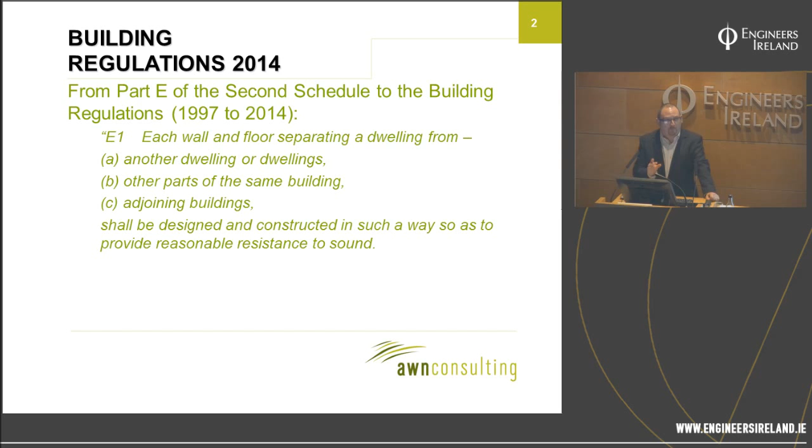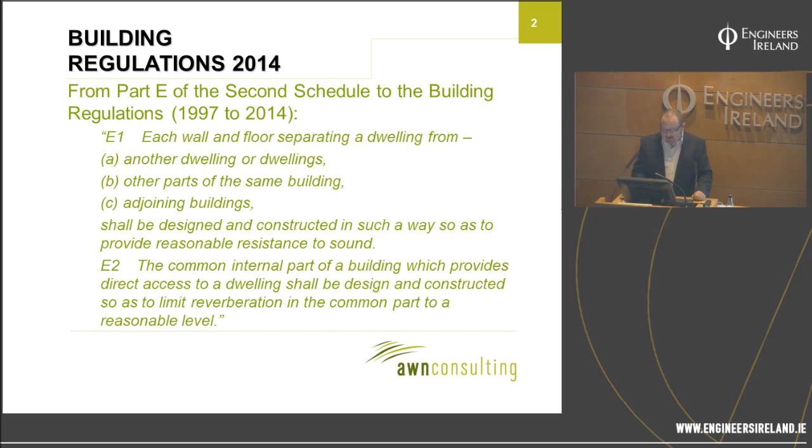We also have a brand new regulation: the common internal part of a building which provides direct access to a dwelling shall be designed and constructed so as to limit reverberation in the common part to a reasonable level. That's really talking about entrance halls, stairways, and corridors giving direct access to multi-occupancy dwellings, so apartments opening off some kind of common circulation area. The idea is to keep reverberant noise build-up down to a reasonable standard to prevent that noise breaking through and transferring into the apartment. That's a brand new regulation, and again there is some concrete guidance as to how it's to be applied.

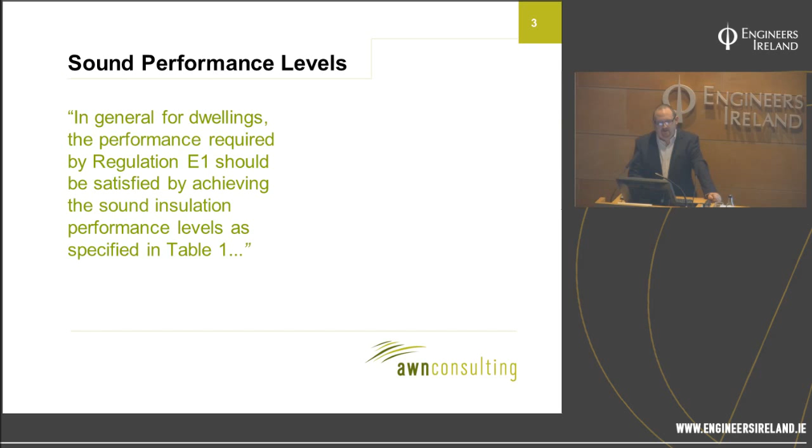So that term 'reasonable resistance' - we now have an absolute performance requirement, and they're set out in Table 1 in the technical guidance document that accompanies the regulations for Part E. I've reproduced Table 1 there.

We're looking at sound insulation in respect of both airborne sound and impact sound. Airborne sound is the sound of a voice, television, anything that travels through the air across the separating construction into the apartment next door, the dwelling next door, or the apartment below. So that's airborne sound. Impact sound is primarily footfall noise. It's only applicable to floors, and it's the noise of people walking around, moving furniture, or dropping things.

Now the way in which these performance standards are set differs - we use two different indicators. For airborne sound we use an indicator DnTw, weighted standardized level difference. That's basically a measure of the degree to which the separating construction reduces the transfer of noise from one side of the partition to the other side. So in terms of airborne sound, the higher the better. The requirement is 53 decibels for both walls and floors.

Impact sound, on the other hand, is measured in a different way. When we measure and assess impact sound, we use a thing called a tapping machine, an instrument that we set down on the floor. It lifts and drops a series of hammers, generating a known level of energy within the floor, and we then measure how much noise is created down below. Obviously the more energy created down below, the louder it is, the worse the floor is performing. So in terms of impact sound, the higher the number, the worse.

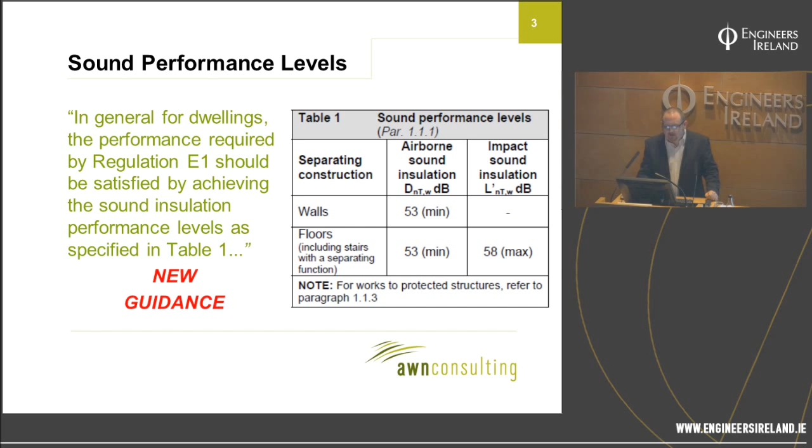So airborne sound, the higher the better. Impact sound, the lower the better, because it means we're generating less noise for any given footfall in the room below. That's all brand new guidance.

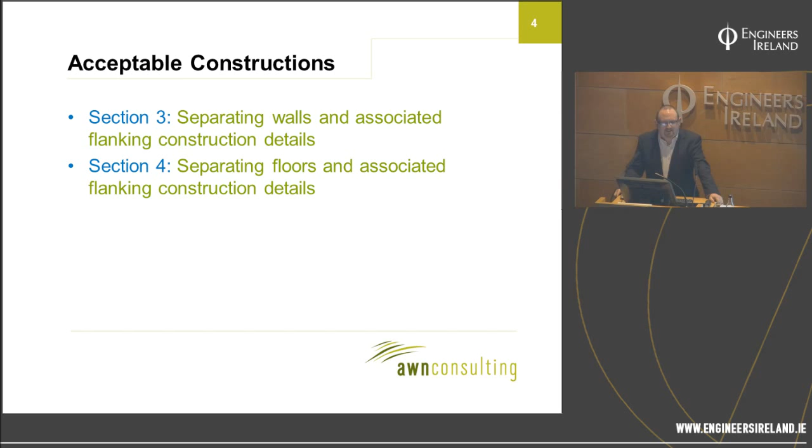Part E, the technical guidance document, contains details of what they term acceptable construction. Section 3 covers separating walls and flanking details. Section 4 talks about separating floors and flanking details. Basically what the regulations are saying is, if you design and construct your separating constructions in accordance with those details, you are in essence in prima facie compliance.

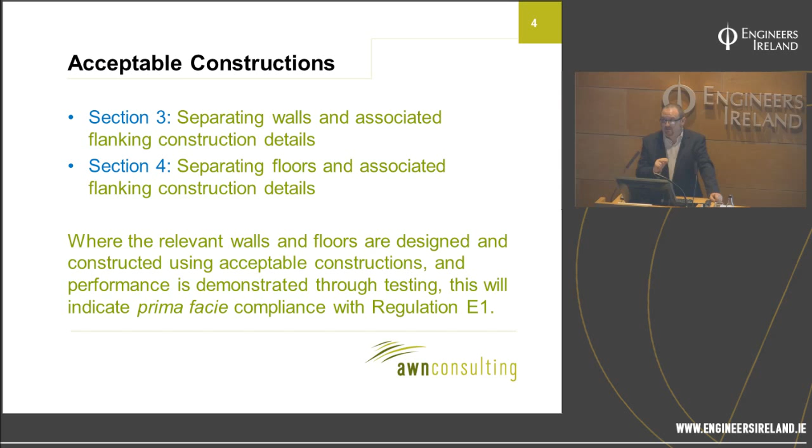But the difference between the current regulations and the old regulations, where that was enough, is that you still have to test the construction. Because what they're saying now is that you're in prima facie compliance in terms of the design, but now you need to go to site and measure the performance in situ prior to completion to make sure that workmanship is of the appropriate standard and that site conditions are fully accounted for. So we can build using these acceptable constructions, but we still have to test them. The advantage being, if we build using these standard constructions, you can conduct fewer tests in order to demonstrate that they're achieving the appropriate level of performance.

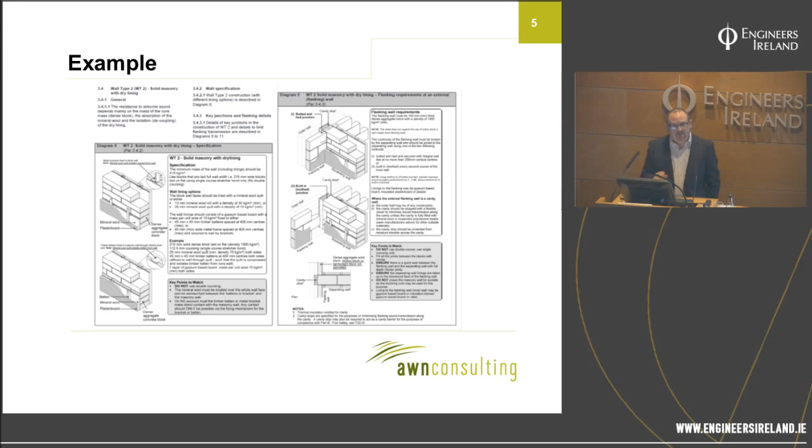Testing is a big part of the new regulations, and it's something we've been lobbying for a long time, because in essence the old regulations relating to sound were pretty toothless. You had no absolute performance requirement that was mandatory. There was no statutory or mandatory requirement for testing. So generally you'd find you were only doing a test where there was a problem, and you were doing it to find out what the problem was and tell them what they had to do to fix it.

But testing is now mandatory. It needs to be conducted prior to completion, and it needs to be undertaken by a competent person. I'll come back to that and dwell on it later, because the regulations are extremely hot on competence, and there are a few reasons for that.

So in essence, you want to undertake tests on a representative sample of your dwellings. You need to look at the different unit types, the different layouts, and in particular the different constructions, and develop a testing program that takes all of those into account, giving you a good cross-section across all the various constructions and unit layouts.

Now, other construction types require more tests. In other words, an 'other construction type' in the context of the regulations is one that isn't set out in Technical Guidance Document E. So if you're using one of those non-standard constructions, you need to do additional testing. However, there is a way of avoiding that, known as the assessed sound detail - I'll talk about that in a minute as well.

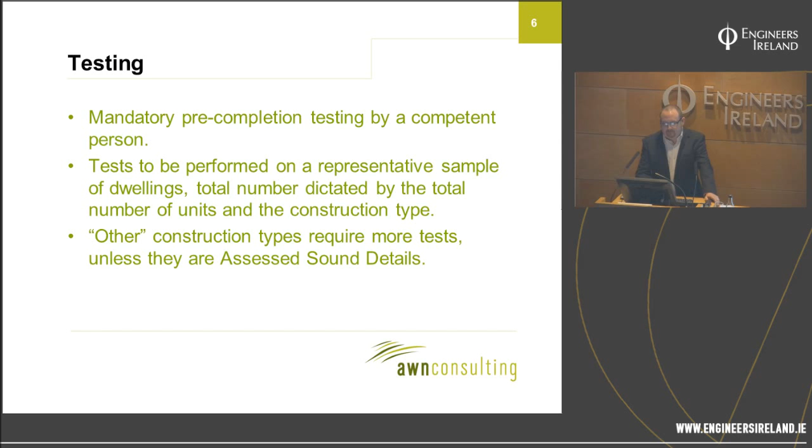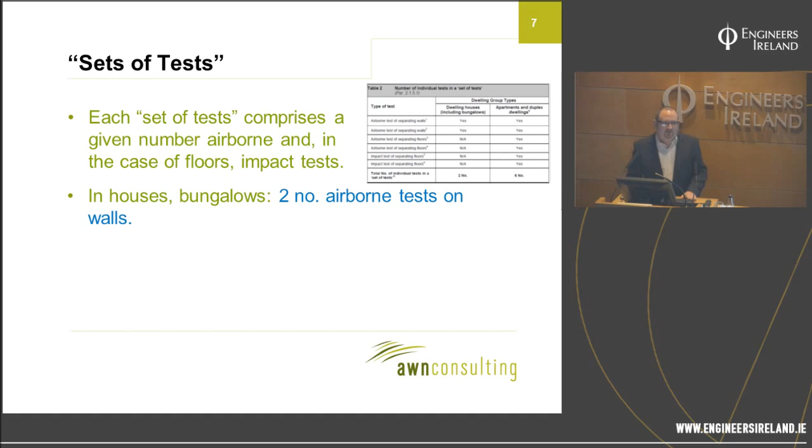So the testing is all brand new. The concept behind the testing is of a set of tests. In houses or bungalows, in other words where there are no separating floors, a set of tests comprises 2 airborne tests on walls.

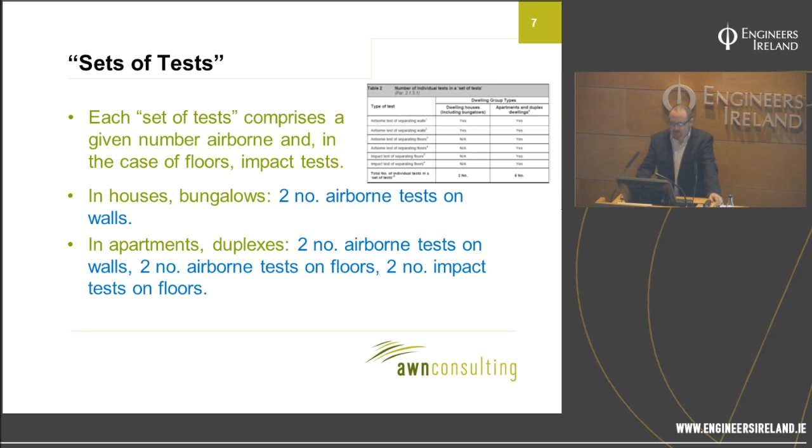In apartments and duplexes, however, where we do have separating floors, a set of tests is 2 airborne on walls, 2 airborne on floors, and 2 impact on floors - so 3 times as many tests. And testing in apartments does take a lot longer than it does in more traditional houses and bungalows.

So the frequency of testing - we've got this concept of the set of tests, and the technical guidance document tells us how many sets of tests we need to do for any given development. First of all, there's table 3A, dealing with the TGD construction. These are the standard acceptable constructions set out in the technical guidance document.

You can see that it's a function of the number of attached dwellings. So if you've 4 or less attached dwellings, you need to do at least 1 set of tests. If you're greater than 40 but less than or equal to 100, it's at least 4 sets, plus 5% times the number of attached dwellings greater than 40. So a fairly simple approach.

You basically say, right, I've got this number of dwellings, how many sets of tests do I need to do? And then depending upon the dwelling type, you know how many individual tests there are in each set.

If you have different construction types on the same site, you need to repeat this process for each different construction type. So if you're using 2 different types of separating wall, and let's say you have 80 houses on the site - 40 built using one wall type and 40 using another - you go to this table once for the first construction type and 40 dwellings, and a second time for the second construction type and the remaining 40 dwellings.

Then we are given the frequency of testing for other constructions, and there are additional tests. So if we take an example, in the greater than 20 but less than or equal to 40 bracket, they're saying at least 2 tests plus 10% times the number of attached dwellings greater than 20 for a standard construction type. For other constructions, it's at least 6 tests plus 10% - so an extra 4 sets of tests.

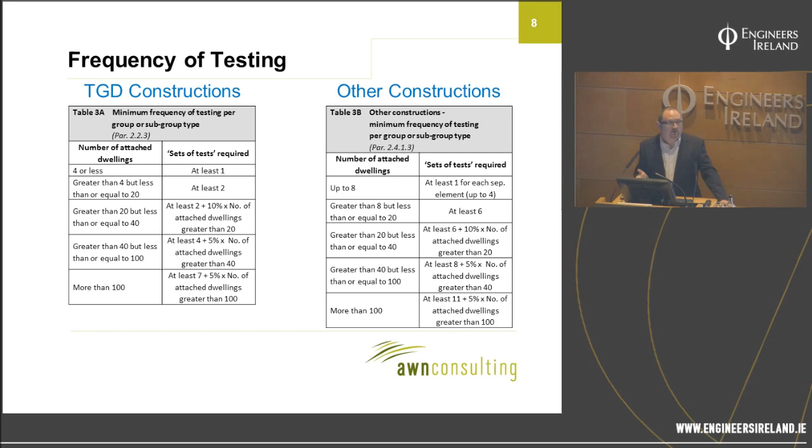So in particular for apartments, using a non-standard construction type can lead to quite a lot of extra tests. Now, in truth, even though there's a lot of information in TGD E about the standard constructions, they're quite prescriptive, so it's very easy to find yourself using another construction. Most of the sites we're working on at the moment are using other constructions, so they need to use the increased frequency of testing.

So the assessed sound detail - when the regulations were being drafted, originally the department wanted every single example of a separating construction tested if it wasn't a standard detail, every single separating partition.

Now, that would have had massive implications in terms of programming, testing on site, and cost. And it was argued at the time that it was also anti-innovation, because if you were coming up with a construction detail that was offering enhanced acoustic performance over and above the minimum in the regulations, you're actually being penalised.

They're saying, no, you need to do lots of extra tests, we don't care how good it is. So after some debate, they rowed back on that, which is how we have these two regimes for deciding how many tests to conduct.

But it was still felt that it was a little unfair that if, let's say, a contractor has a preferred detail they use every time - they may be using it for hundreds and hundreds of houses - why should they have to use that enhanced frequency of testing?

And the department said, okay, I came up with a new scheme called the assessed sound detail. So basically, if you have a construction that you want to reuse again and again, you get it tested on 2 different sites by 2 different test bodies, and you test 30 examples of the construction.

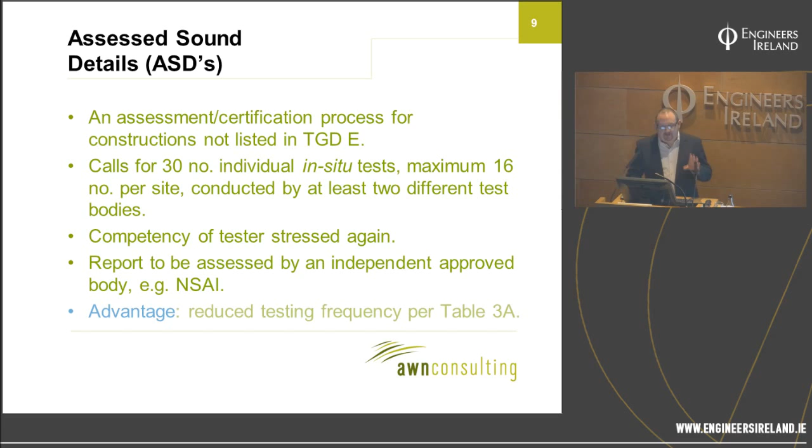And assuming that they all come up to scratch in terms of the performance standard, you can have that submitted to a third party for certification, and that construction becomes an assessed sound detail and is subject to the same reduced frequency of testing that applies to one of the standard details in the regs.

So in other words, it's a way of getting some other construction handled in the same way as if it was a standard detail.

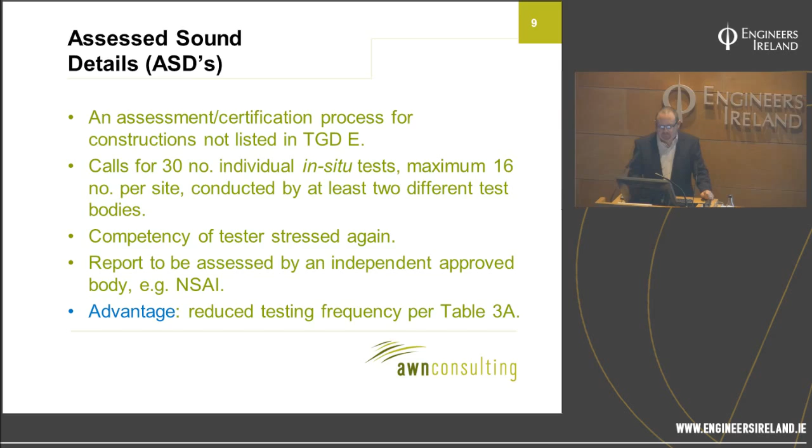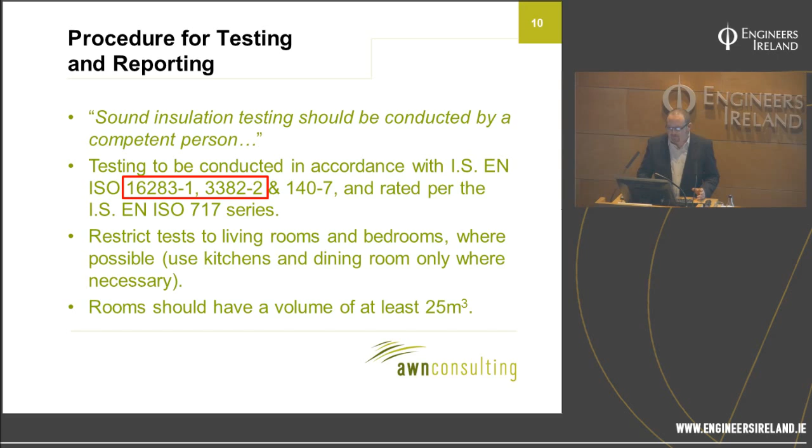And again, provided the apartment layout permits it, rooms should have a minimum volume of 25 cubic meters for testing. So we test in completed but unfurnished rooms.

So these are pre-completion tests. But that really means - pre-handover might be a better expression - because we need everything to be complete. All doors on, handles on, skirting boards, vents, trickle vents, windows - everything needs to be complete. Otherwise you're not testing a representative example of the construction.

Closed doors and windows. If you're testing a wall that has fitted units on it, you need to make sure all the doors are open and nothing in the cupboards. There are rules in terms of where you place your sound source - I'll tell you in a moment what that means.

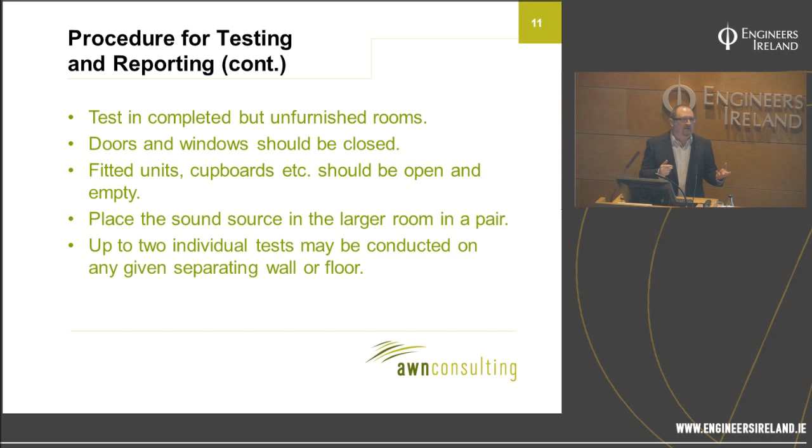2 individual tests on any given separating floor. Now what that means is not the same example of the separating partition, but it might mean you have a separating wall between two houses - you can test a bedroom upstairs and a living room downstairs. That's really what we're saying.

If you test and you fail - and it's deemed a failure if any example of the construction fails to meet the minimum performance requirements given in the regulations - so it used to be...

Although we didn't have mandatory requirements previously, there was what was called a similar construction test method in the previous regulations that allowed you to test a construction. If it came up to a certain standard, it was deemed good enough to be reused on another site.

Now, the levels attached to that became the de facto standard, but they were based on a mean, so you could test 4 or more constructions and take an average performance. And provided the average performance achieved a certain standard, and there was no individual construction that fell below another certain standard, that was deemed to be a satisfactory level of performance.

That's completely gone. There's no concept of means in the testing anymore - it's a single absolute value. So if you fail to meet that single absolute value, your tests are deemed to be a failure. You've got to remediate the failed constructions and retest until you demonstrate satisfactory performance.

And then you need to prove that you can obtain the same performance from all the other constructions. So if you've already tested a batch of constructions that seem to pass, you have to go back and retest, or you have to apply those remedial measures retrospectively to those constructions as well.

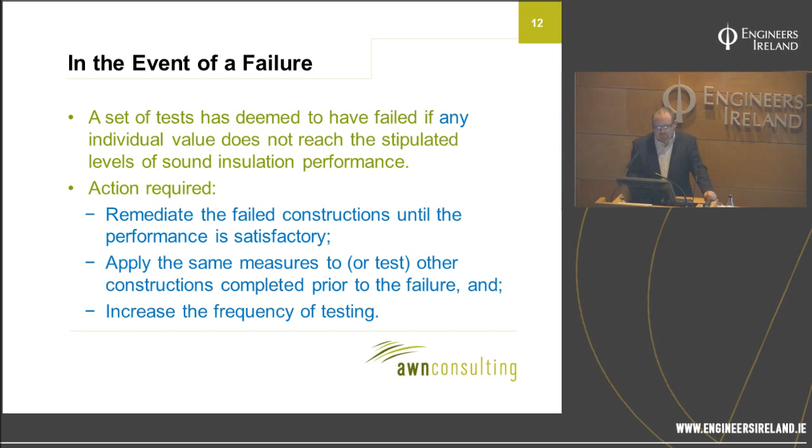And the other outcome is that you have to increase the frequency of testing. So for the remainder of activity on that site, you need to do additional tests. A failure really is bad news. You shouldn't be failing once you've got to this stage.

So the amended Part E was published in December 2014, and the guidance therein, and in particular the detailed guidance in relation to testing, applies to any site where the works or the change of use commences or takes place on or after the 1st of July 2015. So it's only for sites where work has started on or after that date where these mandatory testing requirements apply. So even though we're regularly testing sites, none have yet been tested where there's a mandatory requirement, because they're just not that far on.

The first ones will probably come up towards the end of this year, early next year. So they'll be the first ones under the new regulations.

So we're going to step back a little bit in terms of how we can ensure good sound insulation, because I've just said by the time you get on site and you're testing, you shouldn't get a failure. And there are lots of ways of making sure that that's the case, that you don't get a failure.

Use construction types that work well. Make recourse to existing test data. Or, if you've got a construction for which you don't have much existing data, use a robust theoretical assessment. And we have lots of tools that help us with doing theoretical assessments of the sound insulation performance of constructions.

This is a piece of software called Insul, where we can model separating constructions. It allows us to model three separate panels, frames, and connecting members in between. You can change the insulation that may be in the cavity, change thicknesses, masses, and it's quite accurate - as accurate as any tool like this can be - but you really need to understand the output in order to be able to interpret it properly.

Because what it does give you is a theoretical laboratory performance. So you've got to understand how that laboratory performance translates to in-situ performance.

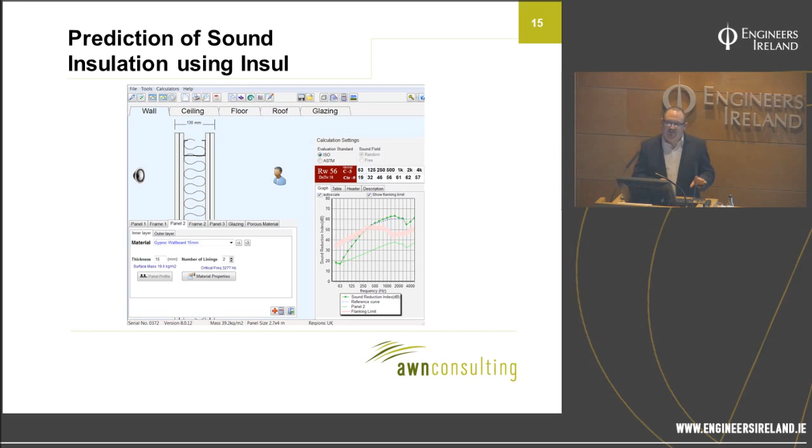Now, one of the ways we can do that is we can use a tool called Bastian. And Bastian basically allows you to model pairs of rooms, and you can model all of the constructions, linings, room finishes, and then assess noise transfer between a source and receiver.

So that little green object represents the source in one room, and we assess how noise travels from that room into the adjoining space. Now the thing about Bastian that's so useful is it tells us exactly how the energy is traveling from the source into the receiver. So it tells us how much noise is going across the separating wall. It tells us how much is flanking through the ceiling, through the floor, through penetrations, window openings.

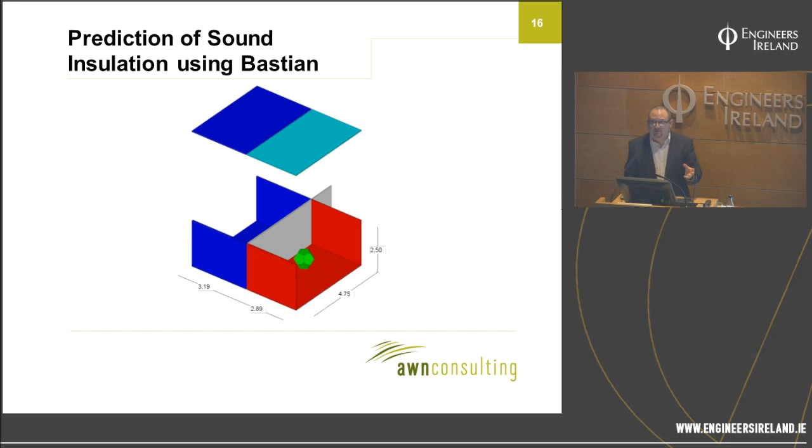So it means that when you're undertaking your assessment, if you identify some kind of shortfall, it'll allow you to focus in very quickly on exactly where that shortfall is arising, what's responsible for it, and you can then perhaps target a wall lining or something at the surface that needs it.

We use another tool called SONarchitect, which, if you like, is a much more detailed version of Bastian. It allows us to assess much larger buildings. And basically you model all of the key constructions in a manner that's meaningful in terms of acoustic performance.

So you don't need to worry too much about detail in every nook and cranny. It's basically overall surface areas, the separating planes between rooms that you need to model. Then you can assign construction types to them. That's what we've done on that drawing. The different colours represent different partition types with differing levels of performance.

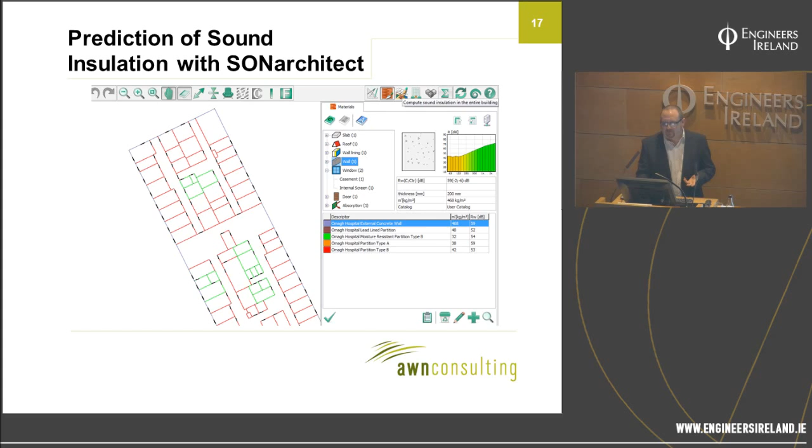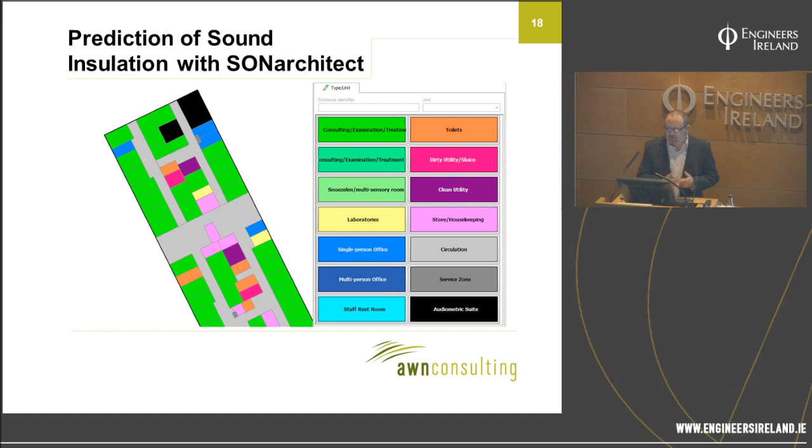Then you attach a usage to all of the rooms, and you can then define all of those rooms' acoustic characteristics in terms of the performance you want to achieve. And then SONarchitect, embarrassingly quickly, will do tens of thousands of calculations for you to work out how noise is travelling around the building. So the example I've been showing you here is a wing from a new hospital.

The procedure is the same irrespective of the building type. And what's great about it is it enables you to very quickly identify where you may have a problem, where your separating constructions aren't coming up to the required performance standard. And here you can see in that example, it's showing me a pair of rooms where there's an issue.

So in truth, the way we would assess the performance is a combination of all three of those tools. We would say, okay, this is the construction we want to use. Tell me what its performance is. Now I'll look at it in 3 dimensions and all of the interfaces, and now I'll look at how it behaves in the building as a whole.

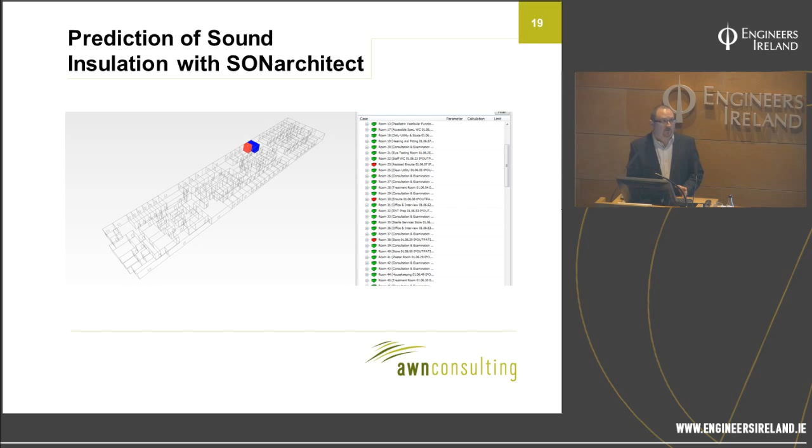We also need to detail junctions carefully. More often than not, when there is an issue with residual sound insulation performance, it's down to some poor detailing. Junctions and penetrations being particular culprits.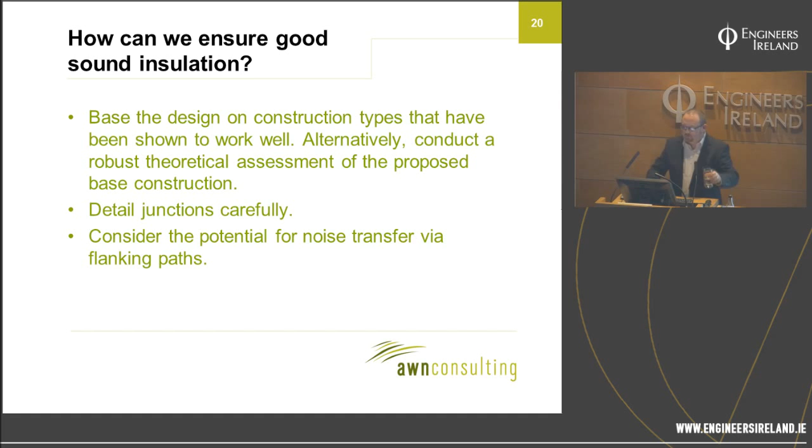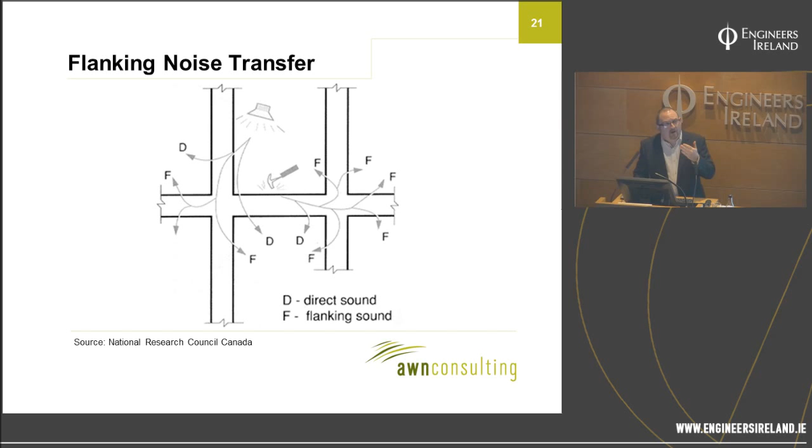Consider the potential for noise transfer via flanking paths. So that little diagram just illustrates that the noise is going to travel. There's one path across the separating construction, which we call the direct sound. And then there are many, many paths for flanking sound. So we need to make sure we consider that. If we've used those detailed tools like Bastian and SONarchitect, those are ways of including a flanking assessment in your overall assessment.

Inspect during construction. Once you've got the design right, you need to make sure it's being built properly. Again, acoustics can fall down on little details. Poor sealing, gaps around a socket box, gaps where the partition comes up to meet the soffit, that kind of thing you need to try and catch during construction.

Conduct pre-completion testing, which is now mandatory. If necessary, make recourse to a variety of noise control measures. We know a lot about how constructions perform. We know a lot about how to fix them if they underperform. We don't want to be there. The rule of thumb that we apply is if we're remediating a construction for acoustics, it will cost between 10 and 20 times as much as if we got it right in the first instance.

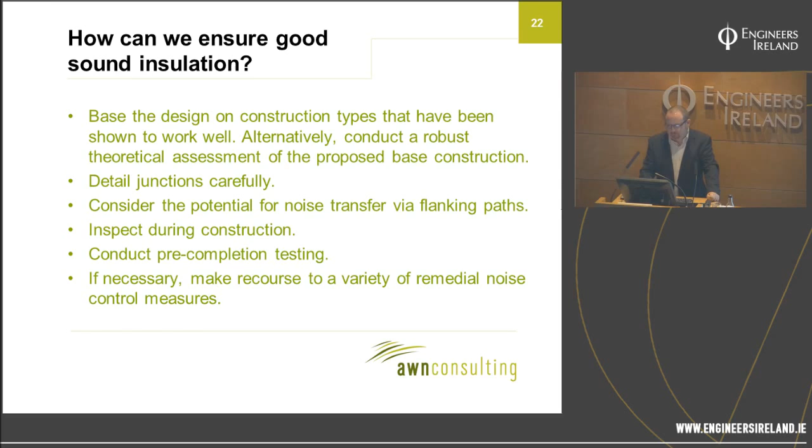So that's sound insulation. I'm going to move on to reverberation control for a few minutes. This, as I say, is brand new guidance. We're talking about controlling noise build-up in common circulation space in multi-unit dwellings. And the regulations give us 2 methods that we can follow to decide how much absorption is needed and where to put it and what it should constitute. And this is all brand new guidance. There was nothing about reverberation control in the previous editions of the building regulations.

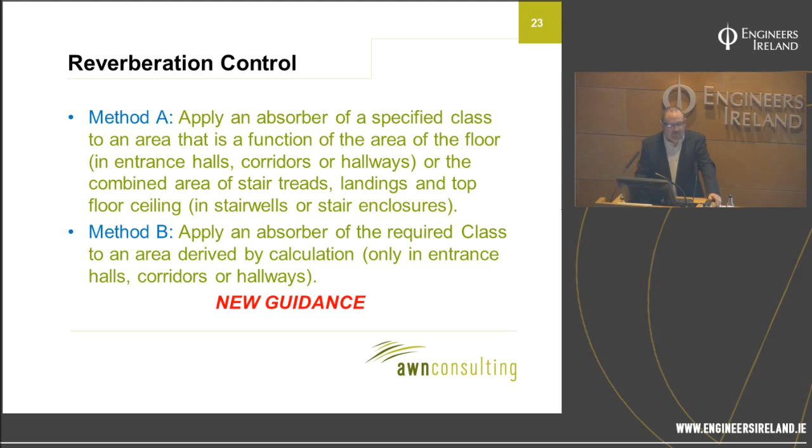So the guidance is based on the concept known as absorption class from A to E. Now, absorption basically describes the ability of any material to absorb sound that strikes it. And we use an indicator known as absorption coefficient to express that. If something has an absorption coefficient of 0, it will reflect all the sound that hits it. And if it has an absorption coefficient of 1, it will absorb all the sound that hits it. Most materials are somewhere in between. So we can classify the absorption coefficient, the absorption of any material by looking at its overall performance. And we look at it across the entire audible frequency spectrum as well.

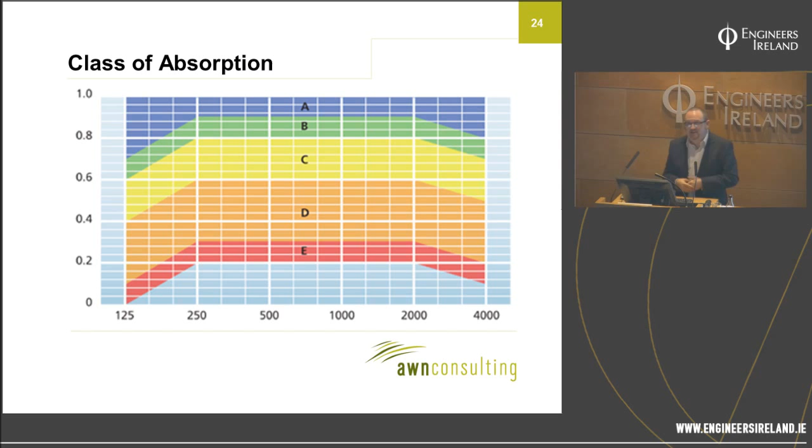So you can see there, class A absorber is the best. In other words, a class A absorber's absorption coefficient performance is in the blue sector right across the frequency spectrum. And then we get Class B, Class C, D, E. A being the best, E being the worst.

So our first method is one that we can apply to entrance halls, corridors, and hallways. And we apply an acoustically absorbent material to an area equal to or greater than the floor area. And it needs to be a Class C or better absorbent. It's quite a simple approach.

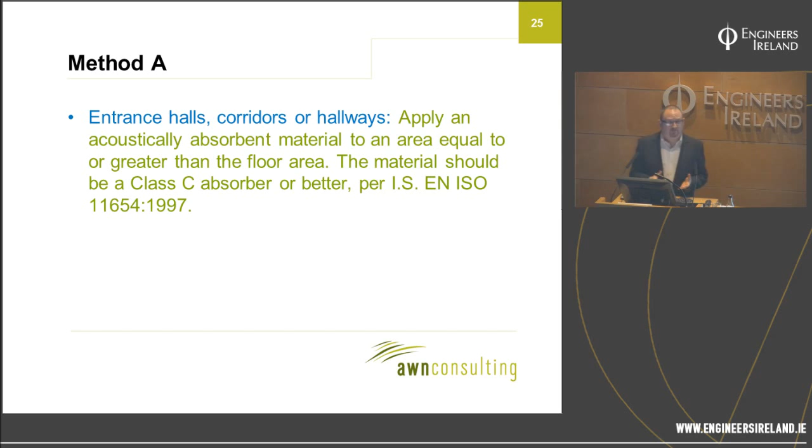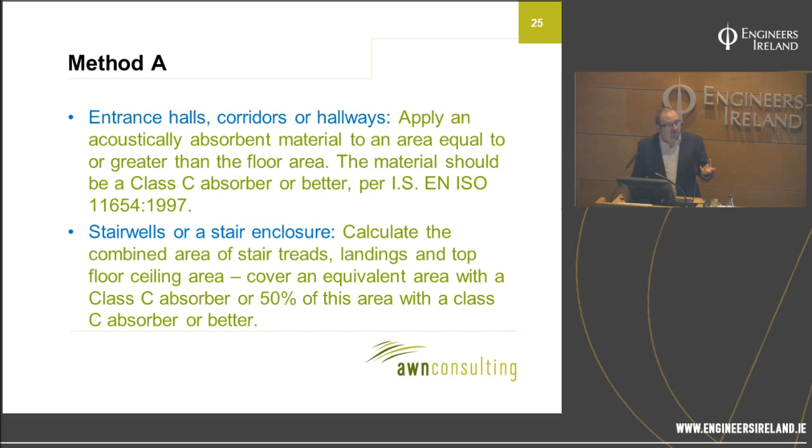Stairwells or a stair enclosure, we have to calculate a combined area of a few different surfaces, stair treads, landings, top floor ceiling area, and so forth. And then we introduce an amount of absorption equivalent to that area, if it's Class D. Or 50% of that area with a Class C absorber. In other words, if you come up with 100 square meters of treatment required for Class D, you can use 50 square meters of Class C because it has more absorption, so a smaller area will do the same job.

Method B is a different approach. Method A, you could see, is quite straightforward. It's simply calculation. You take your drawings, you work out some areas, and you go, okay, I need a Class C or Class D absorber, and I'm going to put it in here.

Method B, in essence, you look at the amount of absorption that's being provided by the proposed basic schedule of finishes, and you look at a performance standard for the particular space, and you calculate the additional amount of absorption that's going to be required.

Although that's a more laborious process, the advantage is that it typically results in requirement for less absorption. So method A, in other words, is a bit conservative. Method B, if we go to the lengths of calculating and assessing, we can use a bit less absorption.

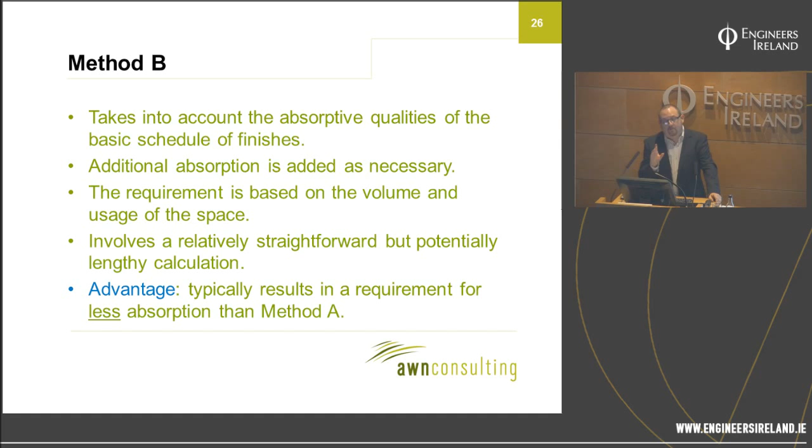So there's an example in the TGD E. There's your construction. You look at all your different surfaces and its absorptive characteristics. There's a calculation template, and that particular example says that if you follow this process, you can use a Class D absorber instead of Class C.

Alternatively, you could stick with a Class C absorber and use a smaller coverage area. So it's primarily a way of saving costs.

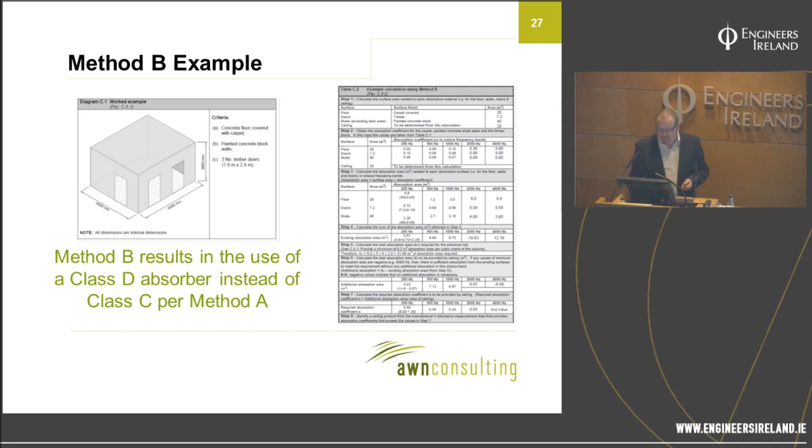Okay, so look, that's the discussion of the regulations and the requirements, and some outline guidance as to how we can go about complying with them. Now I want to talk to you about the certification scheme that has been established in order to cover people who are undertaking the testing work.

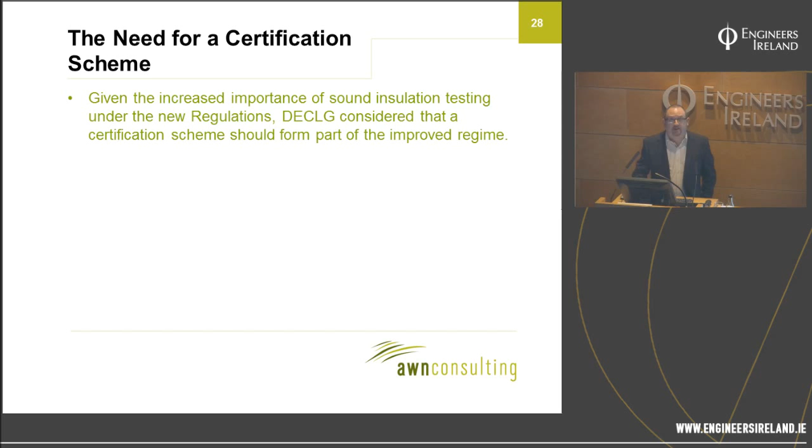It was the department that decided that this new regime needed some kind of certification scheme. They talk about it in TGD E. Sound insulation tests carried out by a person certified by an independent third party to carry out this work offers a way of ensuring that such certification can be relied upon.

So there are two real reasons why the department wanted to go down this particular route. One was to make sure that there would be an adequate supply of suitably competent and properly trained assessors, and the other was to try and make sure that anyone undertaking these tests was up to the job, that they had the requisite knowledge, instrumentation and commitment to do it properly.

Now, by implication, you might infer from that there were people that they considered weren't up to the job, and I think that's a fair point as well. In the absence of any kind of certification scheme, we have had some people, for want of a better expression, dabbling, and we've seen some pretty ropey results coming back and some pretty poor quality testing. So we want to try and stamp that out.

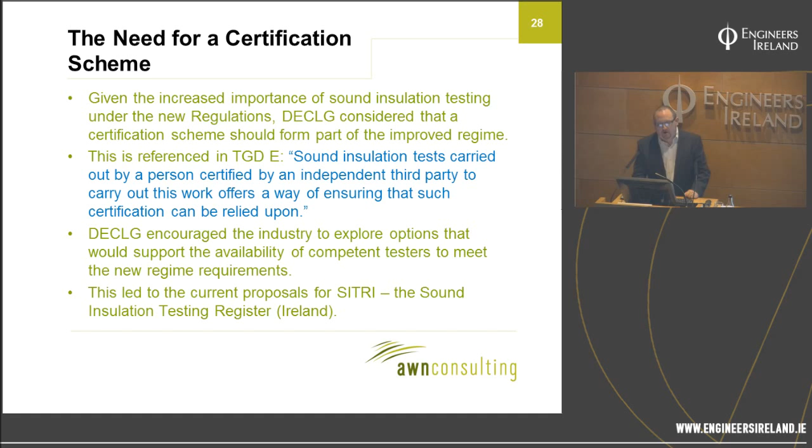So the department were really looking for an industry-led scheme, so they basically extended the invitation out to a few of us that were members of the working group that helped with Part E and said, what can you come up with? So we now have a scheme called SITRI, which stands for the Sound Insulation Testing Register Ireland.

So I want to talk about that for a few minutes, just before finishing up, because it is very much an integral part of the new approach to sound insulation. So the certification scheme has been developed by the Association of Noise Consultants and the Institute of Acoustics. It's a not-for-profit professional body, and it's modelled on an existing certification scheme in the UK.

So the two people behind it, the IOA is the UK's professional body for those working in acoustics, noise and vibration, and we have a very active Irish branch. There's no Irish equivalent. We have the IOA. It kind of fulfills that need.

The Association of Noise Consultants is a trade association for acoustics, noise and vibration consultancy practices. So I suppose the difference between the ANC and the IOA is that the ANC is very much an organisation targeted at consultants, whereas the IOA is a broader umbrella organisation for all kinds of people with an interest or working in the field of acoustics.

So it's quite a comprehensive application process, and I want to go through it not in detail, just to give you a feel for what's involved so that you can see exactly the level of detail that's required in order to ensure that somebody's capable of conducting these tests.

So anybody that wants to become a tester, become certified for doing sound tests, needs to make an expression of interest. They do that through the website. They get a guide to the application process and they get a scheme handbook. They can then go through one of three routes to registration. One is training.

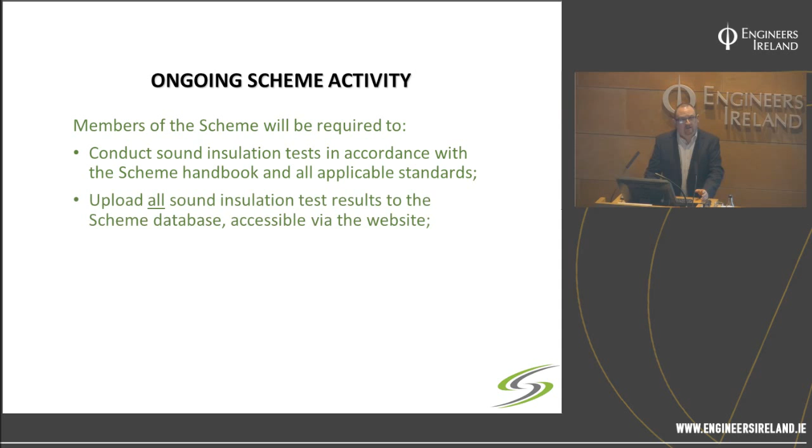Members themselves have to stick rigidly to the application of the various standards and the scheme handbook. They need to upload results to the scheme database, undergo an annual audit, and undergo witness tests. If you don't do it, there will be sanctions and you may be removed from the register.

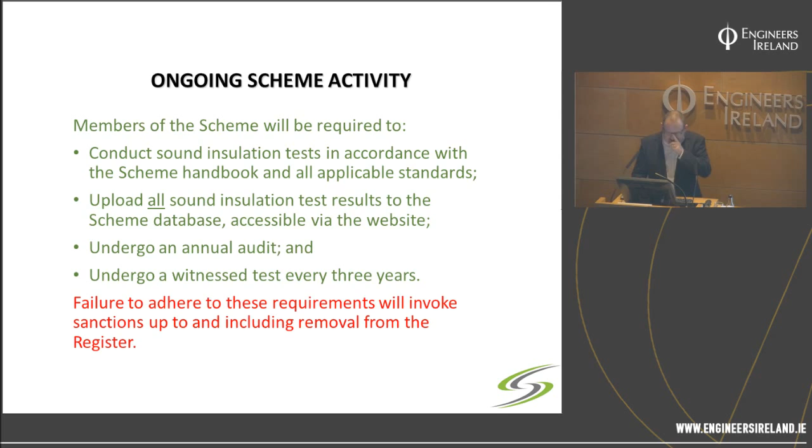One of the reasons I've gone through this in so much detail is because of the importance the new regulations place on competence, and the importance the department itself places on competence. So this is one mechanism for demonstrating that somebody is able to conduct these tests - that you've got a certified tester. I want to be absolutely clear though that it's not a mandatory requirement. A tester does not have to be a member of SITRI, but they have to be able to demonstrate all of this expertise by some other route.

Now, there's no other formal route in the country by which they can do that at the moment. So, for example, an assigned certifier would have to satisfy himself or herself that the tester is ticking all of those boxes - all the same boxes that SITRI is assessing when it certifies someone.

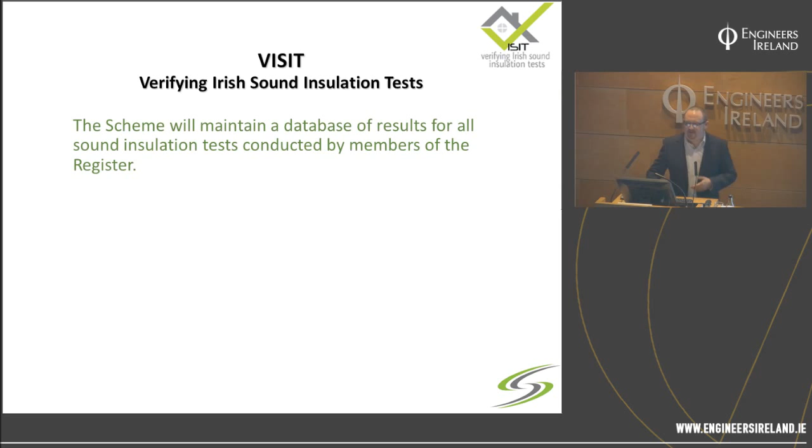Now, the final part of the SITRI scheme is what's known as VISIT, Verifying Irish Sound Insulation Tests, and it is a database of the results that will be accessible to building control, assigned certifiers, clients, architects, etc.

So a certified tester will have a unique password and a site identifier. It's all anonymous, and he'll be able to give this out to, let's say, the assigned certifier, who can go to this website and download a summary report. That will be permanently maintained on record as well.

Now, there's a more formal report as well, but it's big - there's a lot of technobabble in it. The summary report is a very useful way of summarizing the results from a particular site. Not only that, it summarizes the history of a particular site, because if there's a failure, the failure will also be up on the VISIT website. And then the history of increased frequency of testing, additional testing and remediation will all be down there in that summary report as well.

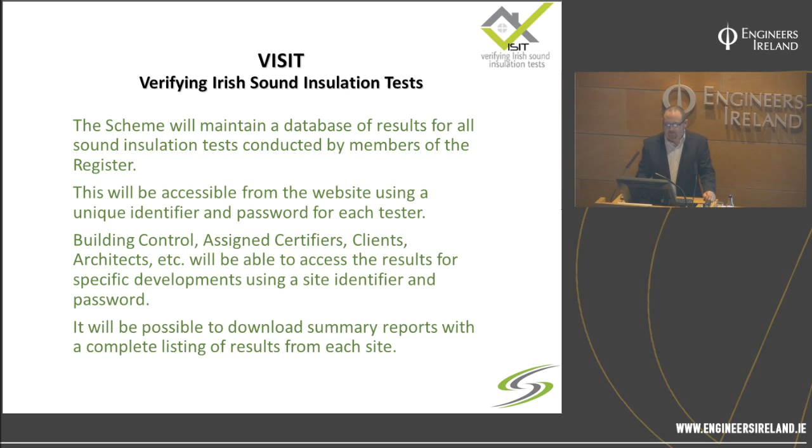The timescale for the scheme itself: new regulations came in on the 1st of July. They were launched at a workshop for building control on the 9th. The scheme's website went live at the end of July. The first presentation of that training course, which had 8 people on it, went live on the 31st of August. SITRI had its first set of registration audits last week, and it has the second set on the 23rd of November. So as of this month, there will be certified testers going on the register, and hopefully there'll be about 20 testers on the register by the end.

And that's really it. I think we've done all right for time, I think. Just about.

Yeah. No, you most definitely can.

58, the first thing is the airborne sound, the 53, is kind of meaningful because any consultant testing these constructions will know how well a construction performs based on its airborne sound insulation performance. The impact figure, because it's the amount of noise generated by this tapping machine, is a much more abstract thing, much harder to really get your head around. An impact level of 58 with the tapping machine corresponds to an audible level of footfall noise, but at a level deemed not to be excessively intrusive. So if you're sitting listening, you will hear footfall noise from above. It'll be dull, not particularly loud, and you wouldn't generally be able to follow someone about the room. Whereas at higher levels of impact noise, if you hear somebody walking about above you, you can literally follow them about the room if it's poor performance. So it is audible. You really need to get down into the low 40s in terms of that impact noise level before it becomes inaudible, or even starts to become inaudible.